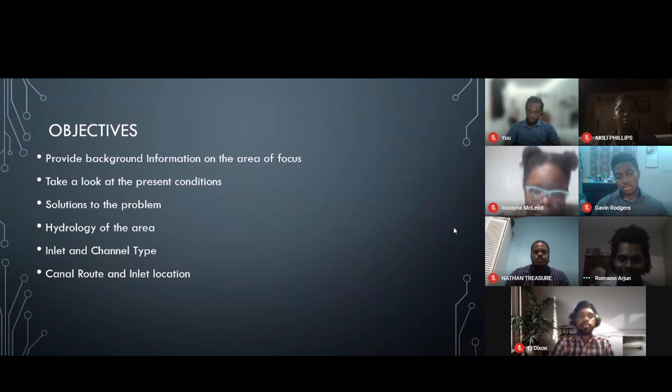So for this project, we decided to review and investigate the Marcus Garvey Drive Road.

In March 2016, contractors and the government of Jamaica decided that they would renovate the Garvey Drive roadway. They spent 20.5 million Jamaican dollars to execute the improvement. However, in 2020, the island had extreme rainfall during the hurricane season, which caused the roadway to experience major flooding.

In January 1970, Marcus Garvey Drive, formerly called Shore Road, was created due to the destruction of the Portmore Causeway. The engineers decided that to construct such a roadway properly, it couldn't just end right there. In fact, it needed to be extended, and that is how they decided to construct the Marcus Garvey Drive Road.

Also, the companies that inhabited that side of the island, such as Petrojam, formerly known as Esso Kingston Refinery, before it was bought by the government, thought it was a good idea because they needed a road and a new area for business.

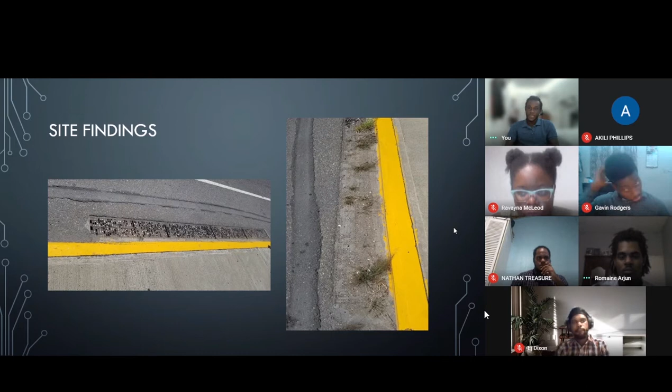On the left hand side we can see an outlet here on the side of Marcus Garvey Drive. We can see a lot of vegetation. This indicates a severe lack of maintenance, so this needs to be cleaned up because it hinders the flow of the stormwater.

On the right hand side here we can see a small outlet. It's very narrow, so the volume of stormwater that flows through it can't handle that amount of capacity, and we can see that it's still being backed up because of pollution.

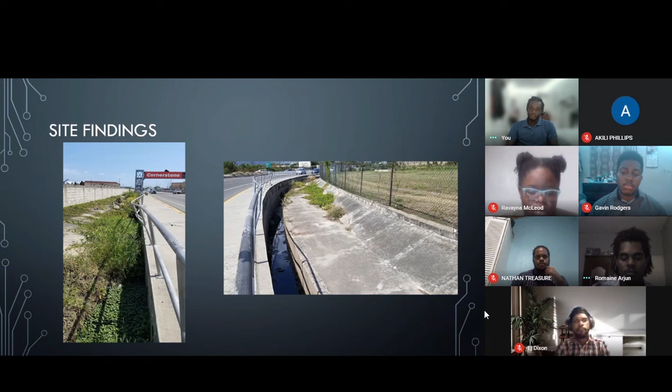This is the outlet which the stormwater from Marcus Garvey Drive flows into. On the top left hand side, you can see a lot of vegetation growing on and on the sides of the canal here. This holds the water in place and prevents flow, so the stormwater just backs up.

On the lower right hand side, you can see a lot of pollution, which adds to the backing up of the stormwater, so this needs to be maintained and cleaned up.

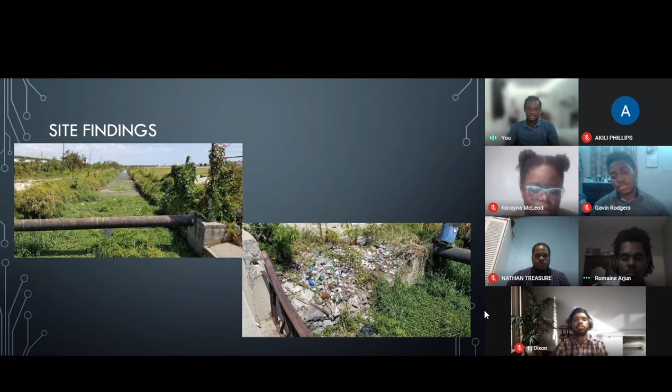On the left hand side, you can see where the outlet meets the drainage here, and the water level is the same. This is a problem because there is no difference here, which won't allow the outward flow of the stormwater, and there's also vegetation.

On the right hand side, we can see a whole fridge in the canal here with a lot of plastics and garbage backing it up, preventing the water from flowing.

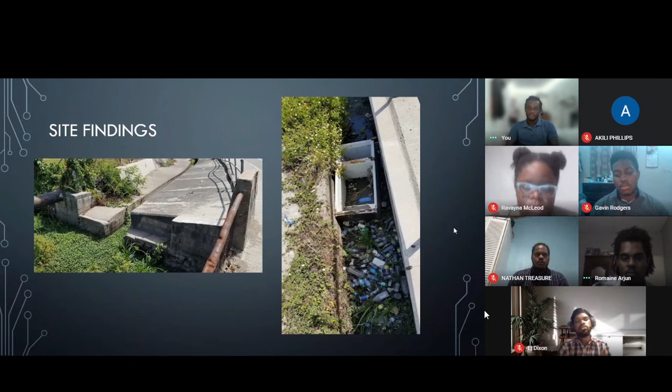Alright, so here we have a major issue with the size. This size can't accommodate the amount of volume of stormwater flowing through it. It is about 2 feet, and that's not enough, so a solution is needed to put in place for this part of the drainage system.

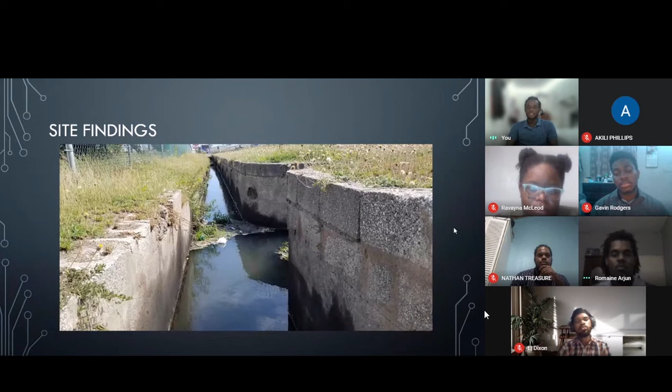Alright, so here is on the side of Marcus Garvey Drive. You can see that if there's heavy rainfall and the road is flooded with stormwater, the water has nowhere to go because the drainage system runs below the sidewalk. So it just flows over onto the side and into parking lots, causing a backup and flooding.

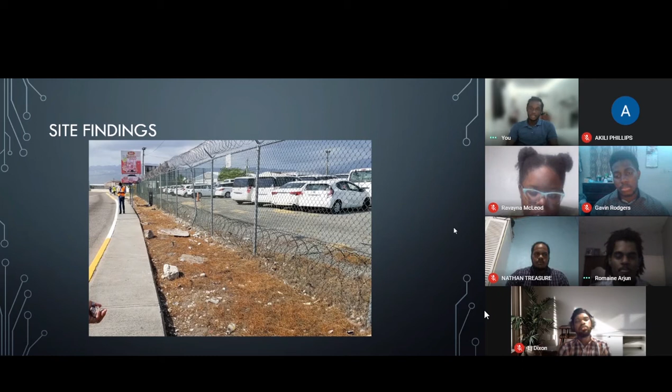So here you can see there is severe pollution going on, a lot of vegetation growing. There's little to no maintenance evident here, so there needs to be a solution for this as well.

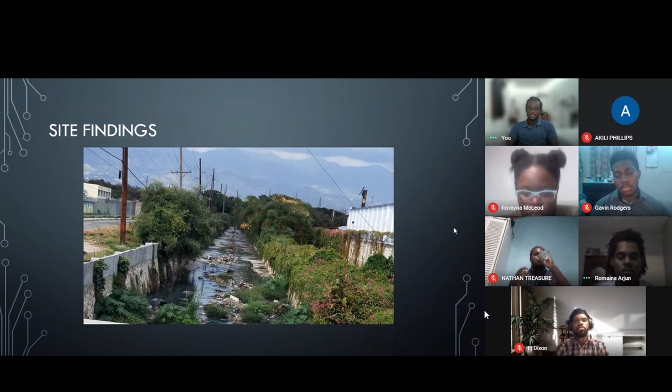Alright, so here shows a small pathway for the stormwater to take. This can't handle any large volume of rainfall, so it just overflows and goes onto the other side of the road. The purpose of this is not really meeting the amount of stormwater that it's designed for. So here's a close-up of one of the inlets on the sidewalk, and you can see where the stormwater is supposed to flow out towards the side here.

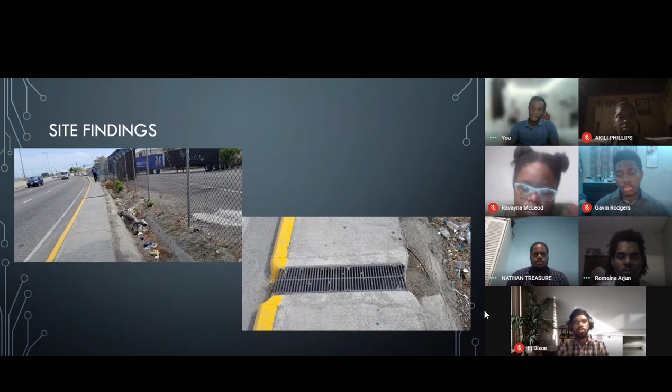Alright, so this is a strip of vegetation where a lot of frequent flooding happens. A lot of the water is held here when there's heavy rainfall. There needs to be a solution for this as well, because this adds to the severe flooding on Marcus Garvey Drive.

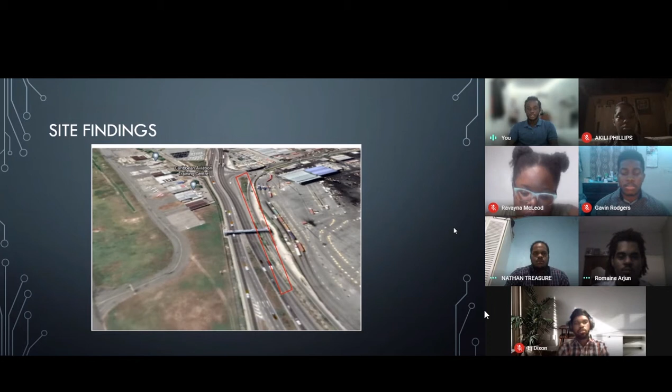Okay, so some solutions. The first solution identified could be to have existing inlets cleaned and possibly updated to handle larger volumes of water. More inlets along the road could also be beneficial to catch more water and transport it to open drains. Another solution is to install an inlet at the bus stop, which is prone to flooding. This can channel the stormwater into the underground drain.

Widening the existing drains near the area prone to flooding is also another plausible solution, as it would be possible to carry more water away to the gullies, thus preventing large volumes of water remaining on the road. For these solutions to work, these drains would have to be inspected at least twice a year to ensure there is no clogging with waste material that would prevent stormwater flow.

Cleaning the drains and removing the pollutants and waste products would also be another solution, as this will clear the water in the drain and allow for more free fluid flow. The outlet stream would also need to be updated so that the stormwater coming from the drains is not at the same level as the outlet water.

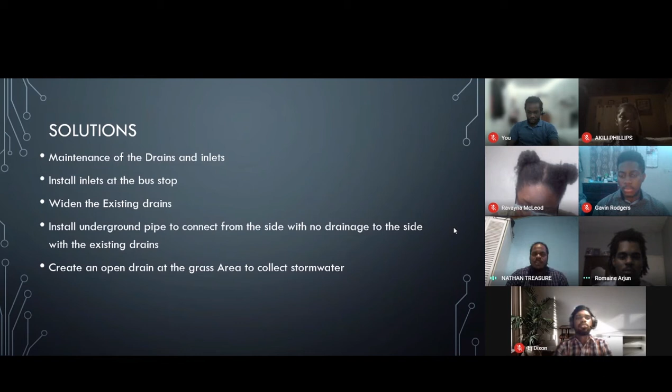Okay, so an alternative solution would be a flood tunnel. The idea of a flood tunnel is basically an area under the surface, hence tunnel, filled with columns weighing tons. So the idea of this flood tunnel for Marcus Garvey Drive would be in the area inhabited by Tinson Pen Aerodrome.

It could be that the government of Jamaica would have to petition for a piece of their land so that they could raise the road that leads to Marcus Garvey Drive, starting at Causeway. Now, it's as I said, just an idea, because the dimensions of the tunnel would have to be a little less than the criteria for landing planes, because the Tinson Pen Aerodrome is right there.

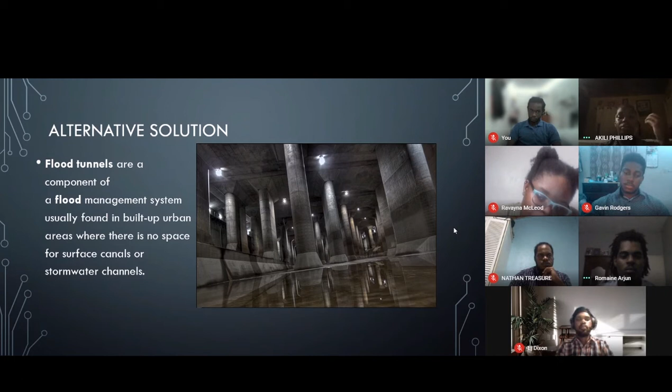Also, when the area is raised by the tunnel, that's where we would pump all the water so that it could freely flow back into the ocean where it belongs.

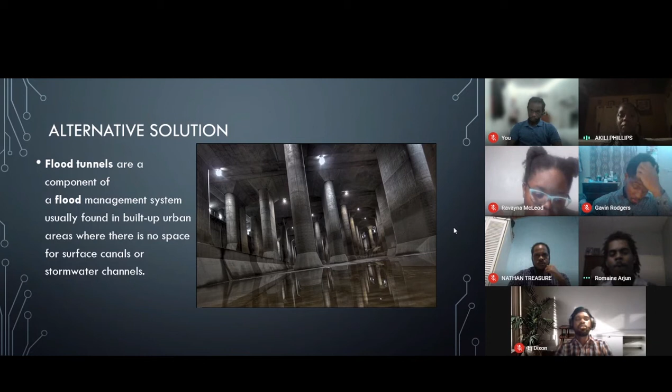Now, the flood tunnel located in Tokyo is about 30 years old, and at that time the budget for such a plan was 2 billion US dollars. If Jamaica had done that for a road that's almost 50 years old, we would still be seeing results.

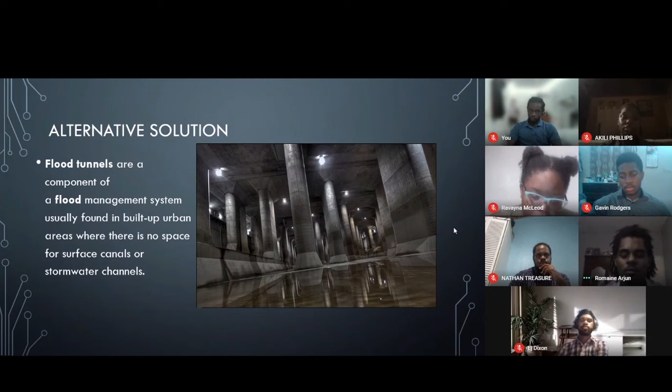Okay, so now for the hydrology. When we speak about hydrology, we're basically talking about the area around our area of focus, or the environment around our area of focus. So given that our area of focus is a part of Marcus Garvey Drive, we would notice that to the left we have Kingston Wharf, which consists of paved grounds, and to the right we have the airfield, which consists of grass grounds.

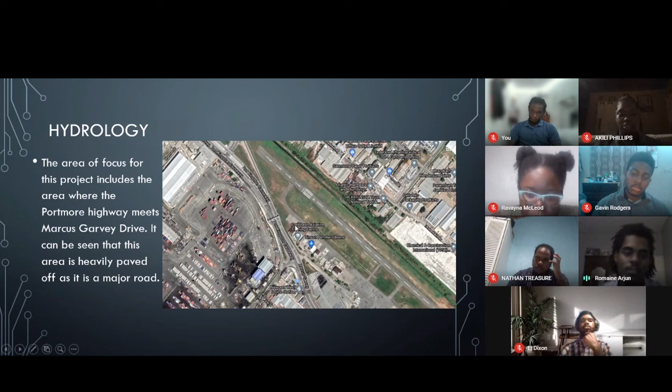Now, another factor about hydrology is the catchment area. The catchment area is basically each area of the environment that contributes water to our area of focus. Given that our area of focus is Marcus Garvey Drive, let's say that in a rainy season, water comes from Kingston Wharf, as well as the airfield. We would have to do a rough estimation to get an idea of how much water would be coming from each area, then sum it up to get our total catchment area, which all would contribute water to our area of focus.

Based off of analysis, we notice that our catchment area consists of our area of focus and part of the highway that is coming from Portmore. Kingston Wharf and the airfield do not necessarily add any form of water to the Marcus Garvey Drive road due to the elevations and slopes that exist.

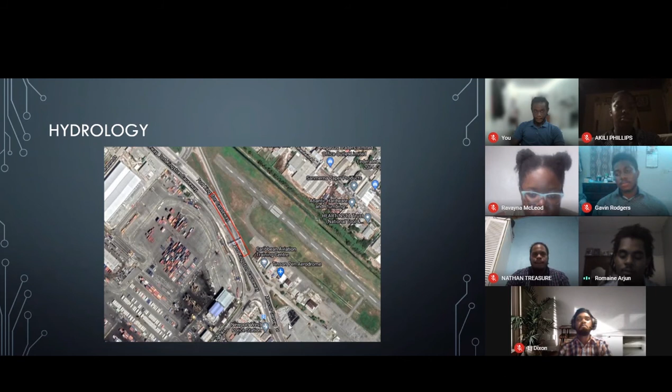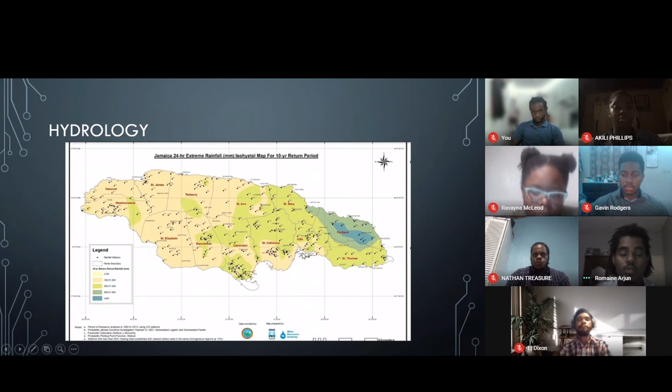So here we have a 24-hour extreme rainfall map for a 10-year return period. You can't exactly see the values, but there is a value beside each black dot. In the area that we're focusing on, the value that we get is 180.6 millimeters of rainfall. Now, using this value, we're going to use this table where we have a 10-year return period, and we're going to be using a duration of 10 minutes.

So using the table, we get a ratio of 0.4. Now, using this 0.4 value, as well as the 180.6, we're going to put it into this equation at the bottom to find the rainfall intensity, which will be later used in our hydraulic calculations.

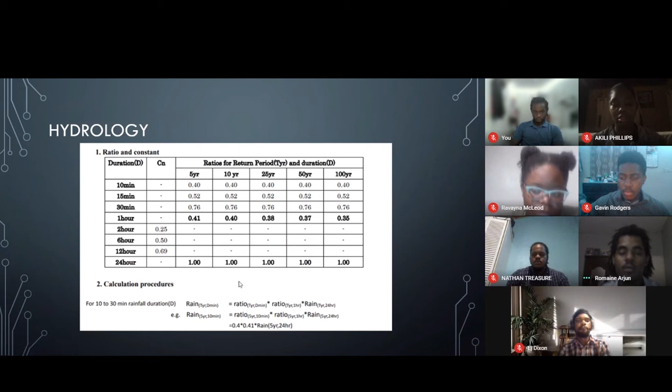Now, in the selection of an inlet, many factors have to be considered. Factors such as maintenance, efficiency, and the inlet's capacity are integral in this selection process. The capacity of the inlet is dependent on the roughness, the gutter longitudinal slope, the total gutter flow, and the inlet configuration. The efficiency of an inlet is the percent of total flow that the inlet will intercept under a given set of conditions, according to Johnson and Chang in 1984.

The efficiency is dependent on the cross slope, the longitudinal slope, the interception capacity, the total gutter flow, and minimally the pavement slope. So therefore, after careful and extensive analysis, the inlet that was selected was the curb opening inlet.

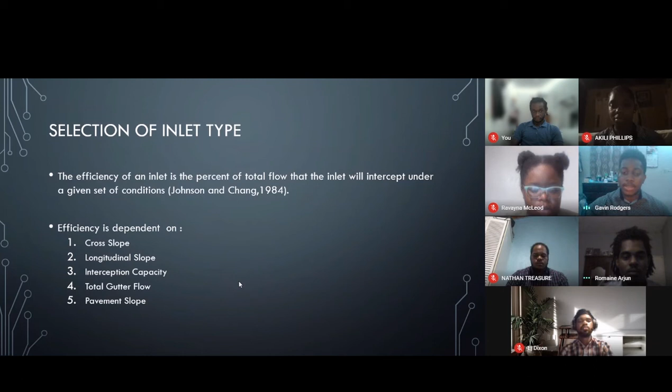A curb opening inlet, according to the Stormwater Studio, is a vertical opening in the curb covered by a top slab. To your right is a visual representation of a curb opening inlet, and these inlets are effective at locations where the flow at the curb is sufficient for the inlet to perform efficiently.

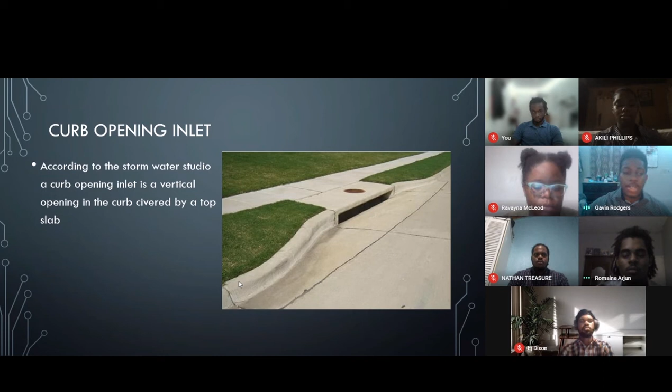They are relatively free of clogging and offer little interference to traffic. We should also know that curb opening inlets do not function well on steep slopes because of the difficulty of directing flow into the inlet. Since Marcus Garvey Drive is not on a slope, a curb opening inlet will suffice.

So to your left here is a visual representation of the curb opening inlet, and we should note that, as I said, it doesn't clog easily and it's bicycle safe, and it reduces maintenance compared to the inlet with grates.

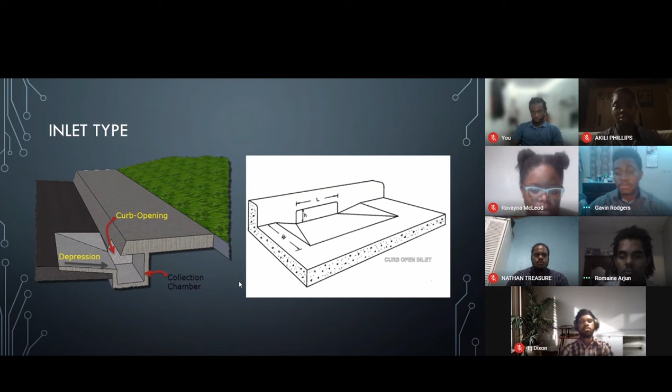Now, as engineers, during our analysis, we're going to conclude our specifications. So for our curb opening inlet, the length we have at 7 feet. KT, which is a constant, we have at 0.6. The gutter flow we have as 2.97. The gutter slope we have at 0.015. Manning's value we have at 0.016. The cross slope of pavement we have at 0.35. The depression over the gutter width we have at 0.75. And the ratio of flow in the gutter section we have at 0.084.

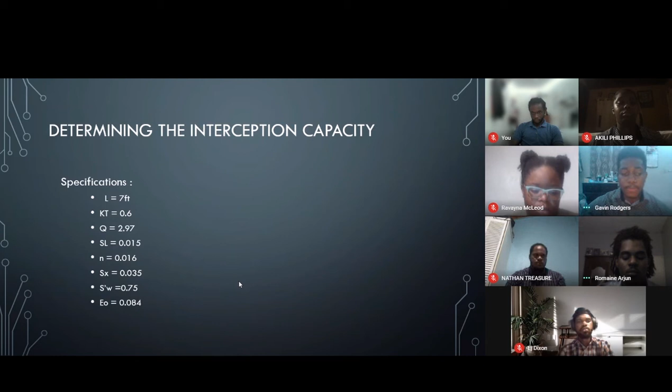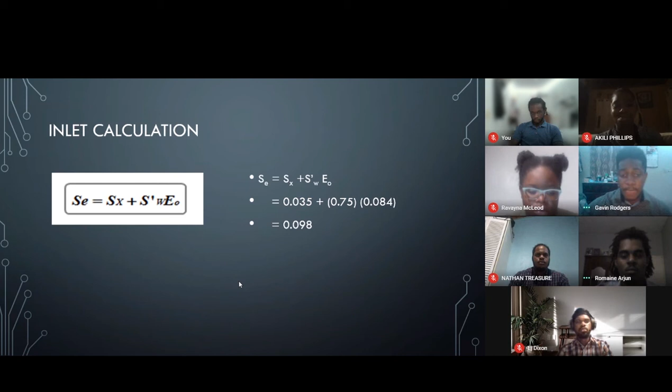Now, to calculate LT, which is the curb opening length, we need to calculate Se first to sub it into LT. So we use that formula and we got 0.098 for Se. And now subbing Se into the LT formula, we got a curb opening length of 12.95 feet.

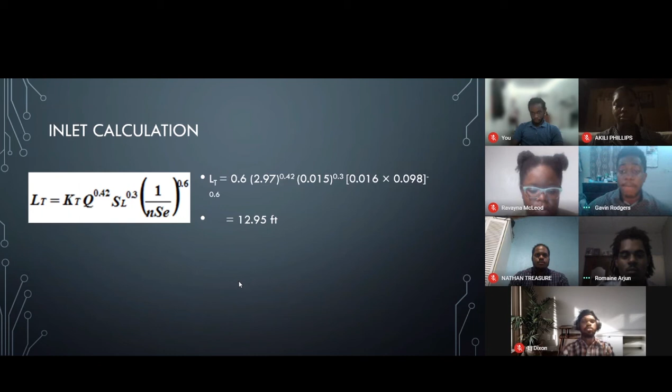Now, if the specified inlet is larger than LT, it will capture 100% of the flow, and Q capture will equal Q. But if the specified inlet is less than the calculated LT, then Q capture is computed differently. Since we got the 12.95, and that is greater than the 7, we have to calculate the efficiency of our curb opening inlet, because it's not 100%.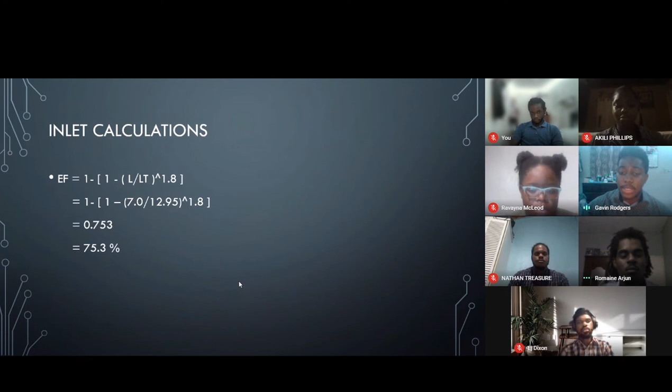So calculating the efficiency of our curb opening inlet, we got an efficiency of 75.3%. And now calculating the Q captured, we use the efficiency times the gutter flow, and we got the Q captured as 2.236 cubic feet per second.

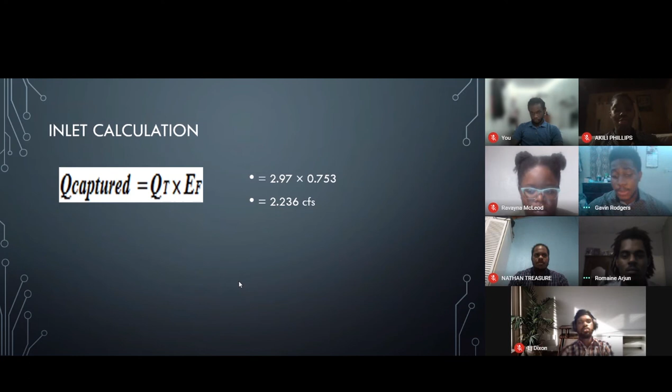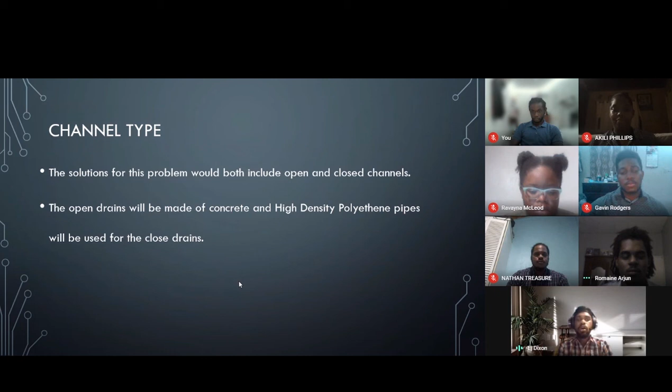For the channel type for this project, based on the solutions stated earlier, it would be seen that the solutions for this problem include both open and closed channels. The open drains will be comprised of concrete, and for the closed drain that will run underground, we concluded that HDPE, high density polyethylene pipes, will be used. In the next slide we show how the pipes will look and how they will be laid. The pipes will be about 2 feet in length.

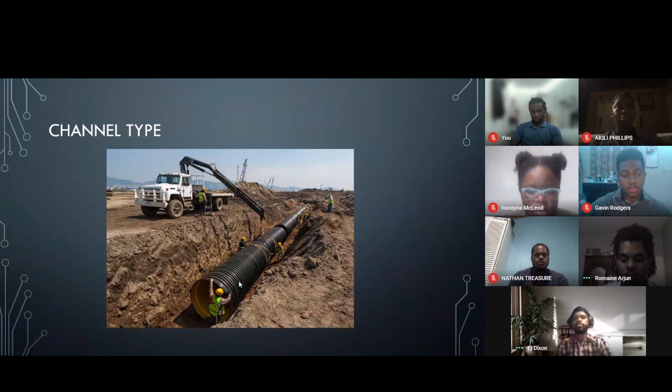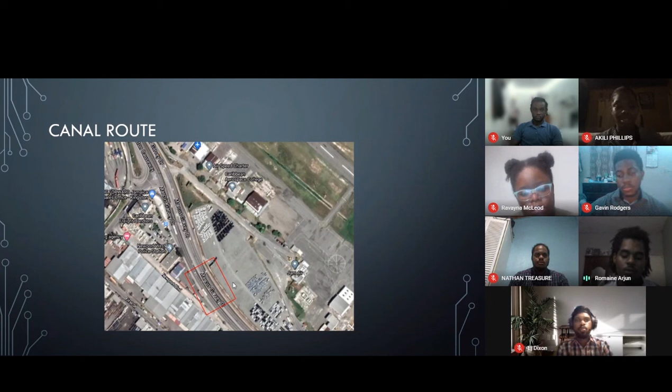The reason we did this solution was due to the distance between our area of focus and the existing gully. This area shows the existing gully that the water is transported to, and this is our area of focus. It can be seen that on the side of the road going towards downtown there is an existing drain present, so we will be taking advantage of this existing drain to transport the water effectively and efficiently.

For the inlet location, there will be a total of 8 inlets installed on the lane going from downtown to Portmore. 4 of those inlets will be installed in the grass area near the overhead bridge, and the other 4 will be installed further down along the road between the post office and wharf, coming from downtown. The purpose of these inlets is to channel the stormwater off the road, and the inlet spacing should be no less than 400 feet apart from each other.

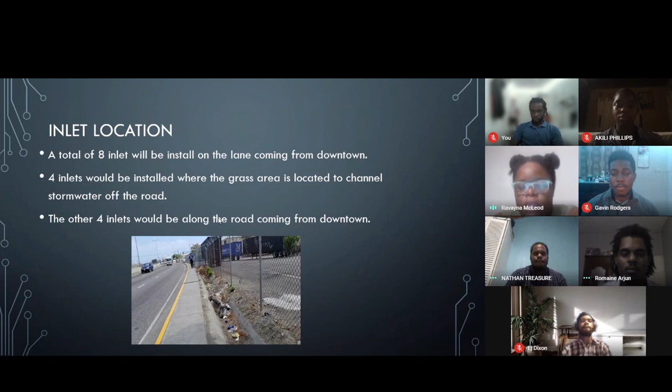We'll be using manholes along the channels for the purpose of inspection, cleaning, and to change the direction of the channels. Manholes are small covered openings in a paved area that allow access beneath, especially ones leading to sewer or stormwater systems. Manholes allow for cleaning, inspection, connections, and repairs. There are three different types of manholes: shallow, normal, and deep.

The shallow manhole is 2 to 3 feet deep and is just for inspection purposes. The normal manhole is 3 to 5 feet deep and is equipped with a step ladder, used for inspection, cleaning, and repairs. The deep manhole, which is 5 feet or more, has the same purpose but has a ladder attached. The deep manhole and the normal manhole are both equipped with a heavy-duty manhole cover.

Since we'll be using inlets that have no grating coverage, we'll be using manholes for the purpose of cleaning out any debris and blockages present in the channel line. For our project, we'll be using either a normal manhole or a deep manhole, since we need the manhole to be big enough for persons to walk through to check the channel lines and make sure everything is cleaned. The manhole spacing will be anywhere between 300 to 500 feet apart.

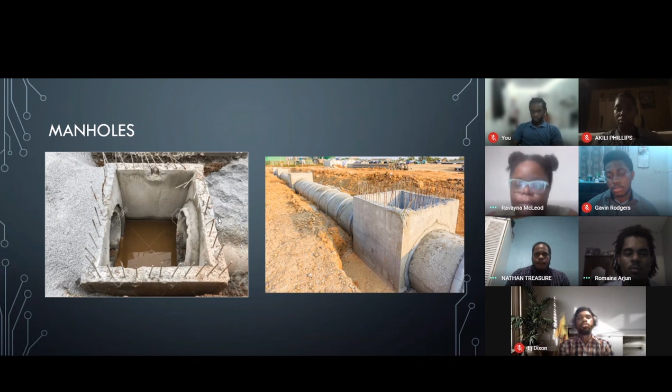In conclusion, background information on the road was provided, the current condition of the area of focus was discussed, possible solutions to mitigate the problem were shown, and the hydrology of the area, the inlet type, channel type, canal route, and inlet location were all stated and explained.